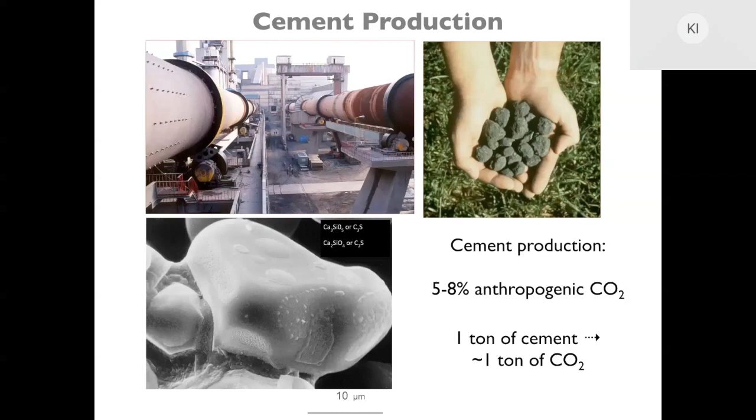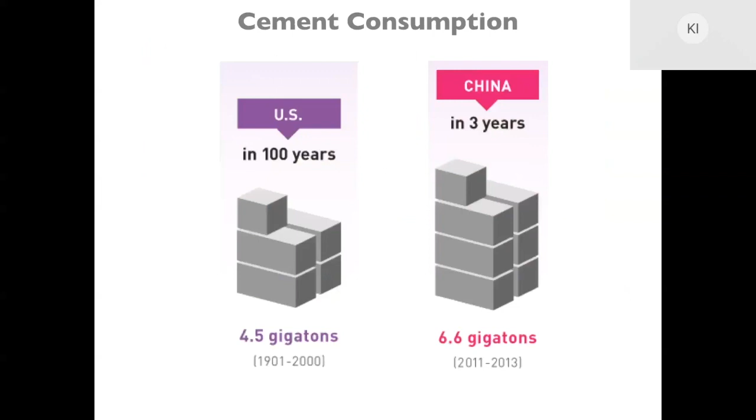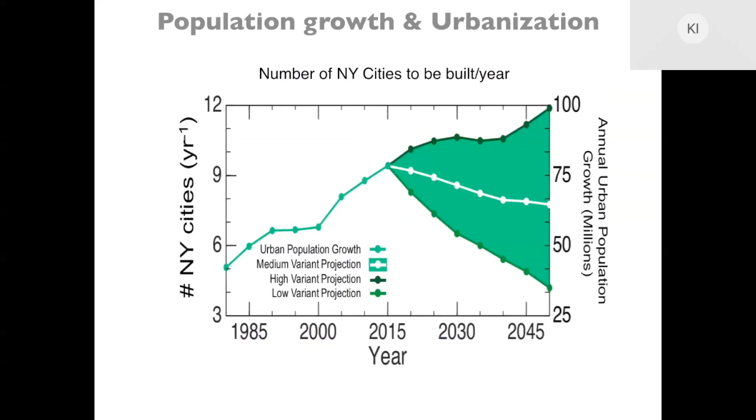This means a huge amount of cement is going to be poured in the coming years, and ideally we want the material to be very durable, so the buildings we're building stand there for many years. Unfortunately, there are a lot of problems with cement and concrete. Usually we have a nice slab of cement, and after a year, or hopefully more than a year, we have the formation of many cracks and fractures.

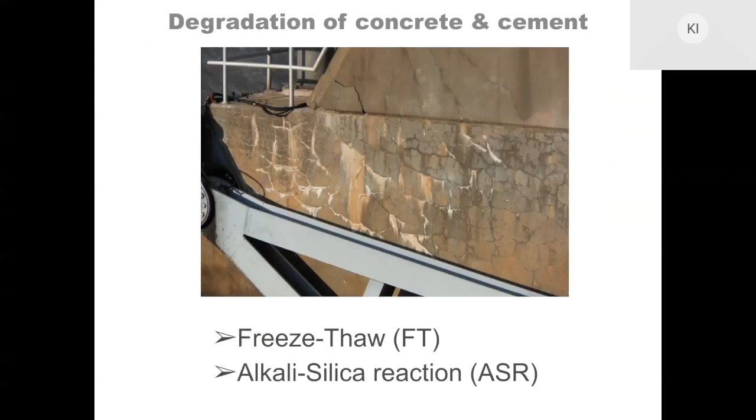Two of the main problems we have been studying a lot at the Hub are degradation due to freeze-thaw and due to alkali-silica reaction. Both of these problems have a common feature: we basically have a crystallization problem in a porous medium, where the porous medium is the cement paste and the concrete. In both cases, we have a new phase forming in the porous network. For example, in freeze-thaw, we have water crystallizing, and in the case of alkali-silica reaction, we have the formation of a gel due to the silica-rich aggregates that exist in concrete. This is the common feature of these two durability issues, but they have a bit of different conditions for why this is happening.

In the case of freeze-thaw, the problem is the drop of temperature in the winter, and this problem is getting worse as we add de-icing salts to the surface of pavements to prevent accidents, which makes the problem even worse. An important point is that in order to have this type of damage, we need a high degree of water saturation — the material needs to be saturated with water, otherwise damage is not observed.

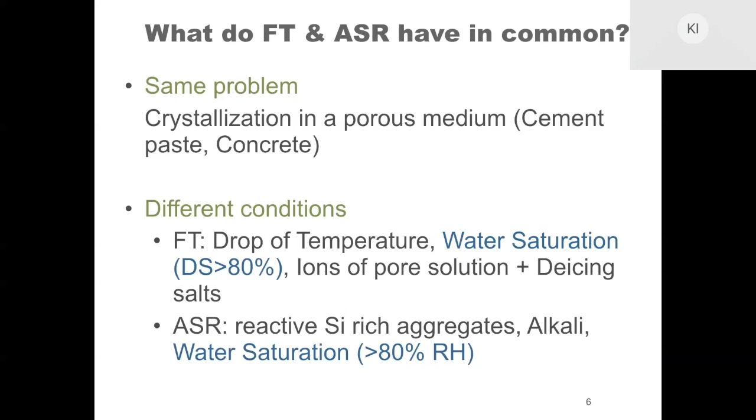In the case of alkali-silica reaction, the damage occurs because silica-rich aggregates start reacting after many years inside the concrete. The presence of alkali is the reason, but again the material needs to be saturated with water, otherwise the damage doesn't propagate so fast. So as you notice, we have two different reasons why we get this damage, and in each case we get a different phase: in freeze-thaw, we have ice.

In the alkali-silica reaction, we have a gel phase, so it's a soft phase. Actually, it's a problem of solidification, as we can better say, instead of crystallization, because it's not always a crystalline phase. But what is very important in both cases is that we need to be saturated with water.

So basically, one of the key problems is where the water is, how the water is distributed inside the pores of cement, and how it is causing the damage.

So here in this cartoon you see the reason why we have damage. Here you see a pore of cement, and inside, the blue is the new phase, the new crystal or solid that is forming. During this process, we have the confinement of ions between a nanometric layer of the cement and the new phase that is forming.

Basically, this confinement of ions is building up an ionic pressure, and this is what is pushing both solid phases apart. If the new solid phase is as strong as cement, then the damage starts passing also to the cement phase. So the new thing here is that not only water is important, but also the ions.

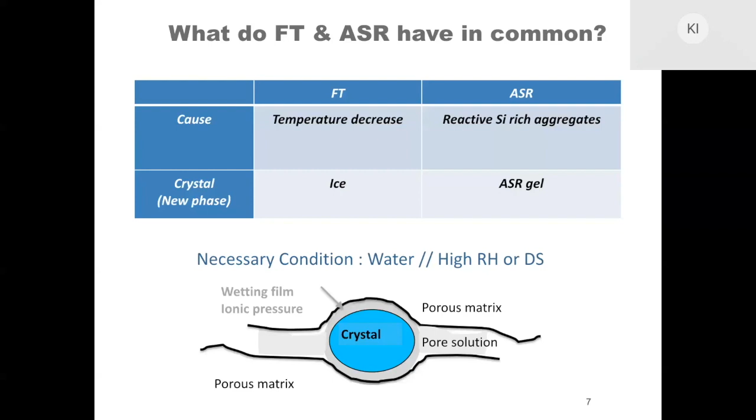With these things in mind, I will try to show you how simulation can help us gain scientific insight on durability issues of cement and concrete. We will start by looking at what are the relevant length scales to explore these questions.

Then we'll try to understand which pore sizes matter for this type of problem. Does the connectivity of the pores play a role? And then, of course, the key question is: what is the role of water, the solvent, and what is the role of ions?

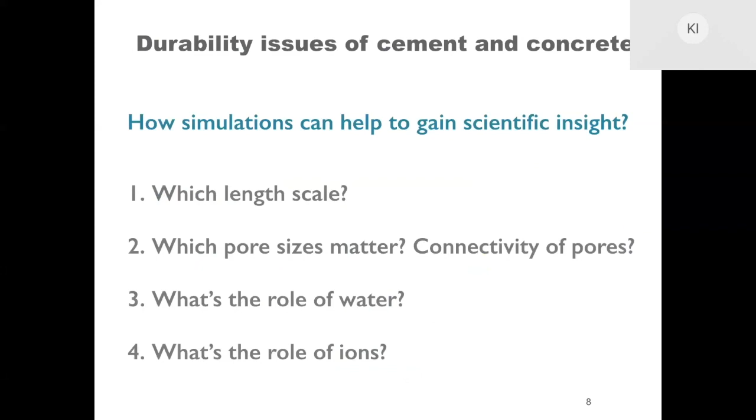As you all know, and we have been discussing this a lot through all the years of the CSHub, cement is a very multi-scale material, and it's very messy at many different scales.

In this work, we went one step further and also introduced water and ions into the pores of cement, to see what is the effect on the mechanics of this porous material.

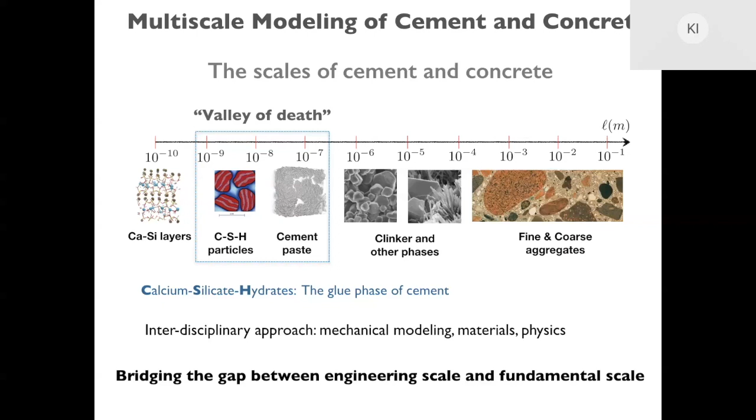I will start by showing you an X-ray tomography of a piece of cement. Here you see a piece of cement that we are scanning through. The white part is the unreacted clinker, the gray part is the cement paste, and the black is the porosity. The pixel resolution is 64 nanometers, and this was a slab of 35 by 60 micrometers.

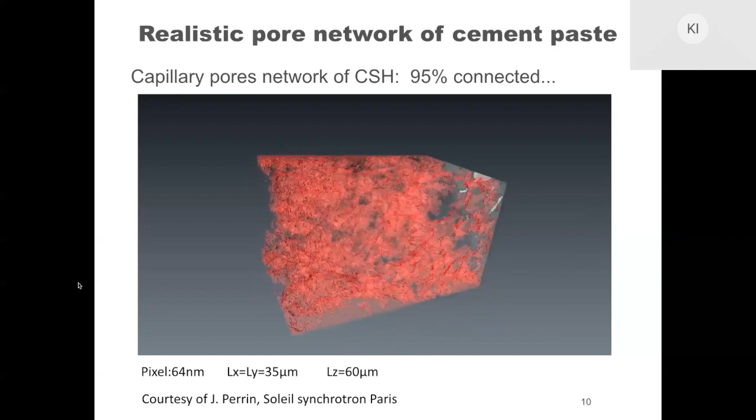The red network that you see here is the pore network of cement. As you can see, it's very complex, very tortuous, and actually it's connected up to 95%. Basically, all the pores of cement, no matter what size, are connected with each other. Very few pores are isolated in the material.

So that's a very important feature we should keep in mind when we try to model all these types of durability issues.

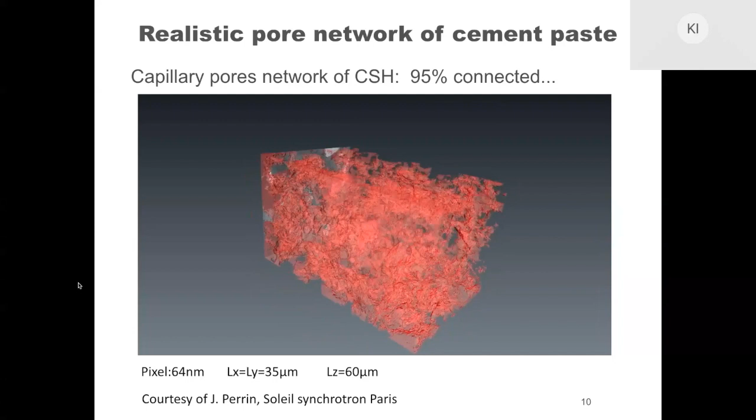Here you see the view of this material from simulations at the smaller scale. The simulation box you see here is around 0.4 micron. The gray sphere is the calcium silicate hydrate. You see them zoomed in on the side, which are nanograins of a few nanometers, around 5 to 10 nanometers.

If we zoom in inside these nanograins, they have a very complex atomistic structure that you see at the bottom. At this scale that we are working on, the mesoscale, we don't keep all the chemistry, otherwise the simulation would be very heavy, but we carry this chemistry through the effective interactions of the calcium silicate or cement hydrates.

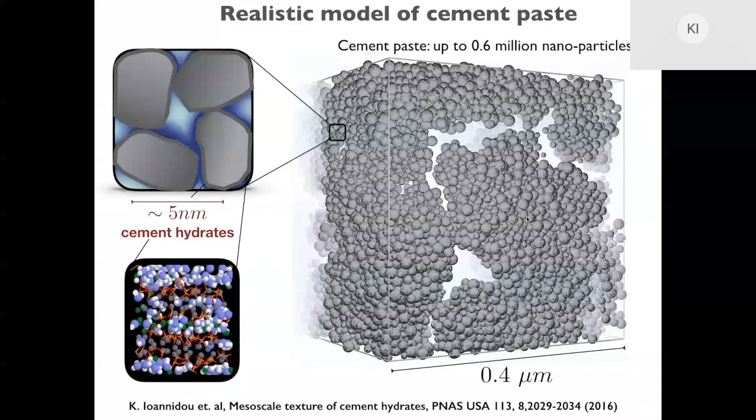I've explained many times in the past how we've done the simulations—what are the effective interactions arising from ion correlation forces. Then with the right simulation techniques, combining Monte Carlo and molecular dynamics simulations, we get a structure which is very heterogeneous, giving a very interesting pore structure with basically the two main features that one sees in experiments for cement.

These are the gel pores, the ones you see on the left in the zoom in, which are pores of 1 to 5 nanometers found in between the close-packed cement hydrate grains. Then we have the capillary pores, between 5 and 50 or even larger, up to 100 nanometers, found in the way these grains form clusters and aggregate into larger structures.

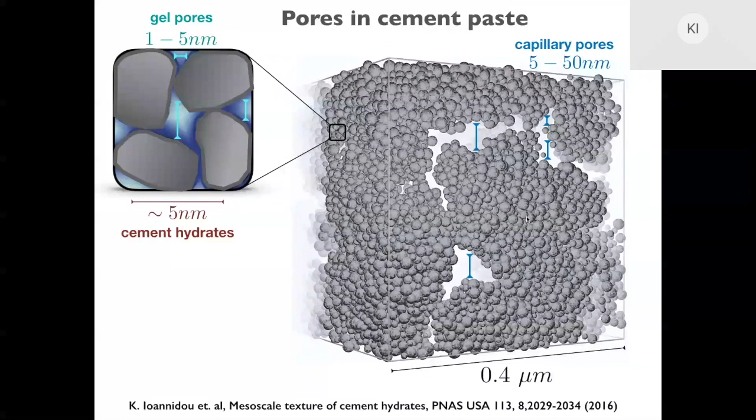So what I've just shown you here is the cement grains in gray. And if we visualize the opposite, the pore space, you see it here in blue. This is a space that will be filled in with water, at different degrees of saturation depending on the type of simulation we do.

I also want to show you the pore size distribution we get from simulations, which we have validated against experiments. It has exactly the two features found in experiments: the first peak of gel pores, and then this very broad distribution of capillary pore sizes.

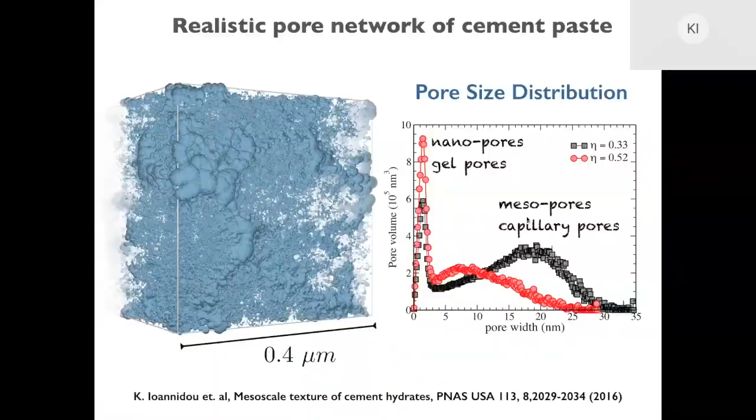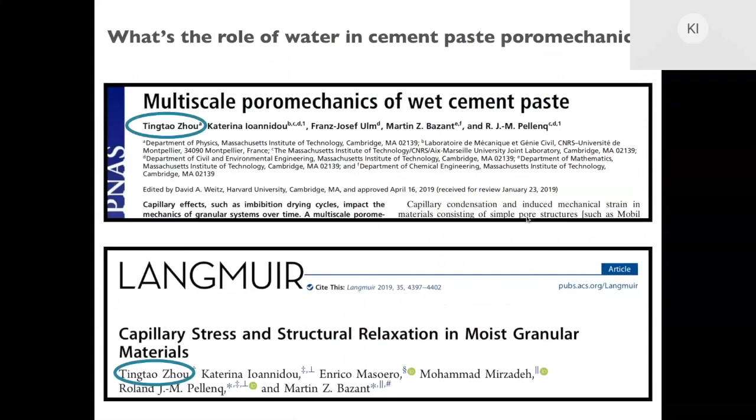Now let's enter our main question: what is the role of water in cement-based poromechanics? The work I'm going to present has been published recently in these two papers, in collaboration with Tingtao Zhou, PhD student at the Hub, who also graduated yesterday. Congratulations, Tingtao. Let's go into our main subject.

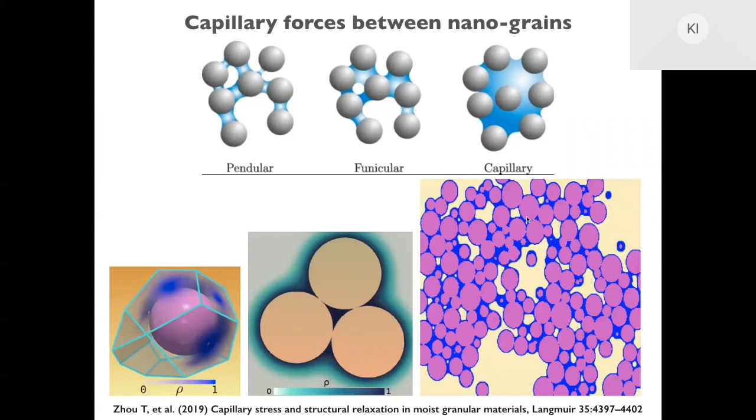To do so, we start with the cement paste model I showed you before with the grains, the one on the left. We take this particle-based simulation and turn it into a lattice, where each lattice point can be either fluid or solid.

What we did was density functional theory—a mean field approach where we write a thermodynamic potential that takes into account the interactions between fluid-fluid and solid-fluid. What's important is to calibrate these two parts, the fluid-fluid and solid-fluid interactions, from the formations of the materials we are modeling.

In this case, the fluids we tried were water and nitrogen, because those are the two common fluids used to probe the pore space of cement. We also calibrated the solid-fluid interaction from atomistic simulations.

A very important point here is that we try to see how a piece of cement, around half a micron, interacts with the fluid—water—where water molecules are very small, about 3 angstroms. So we had to make a grid of this lattice as small as the water molecule in order to use a mean field theory for this.

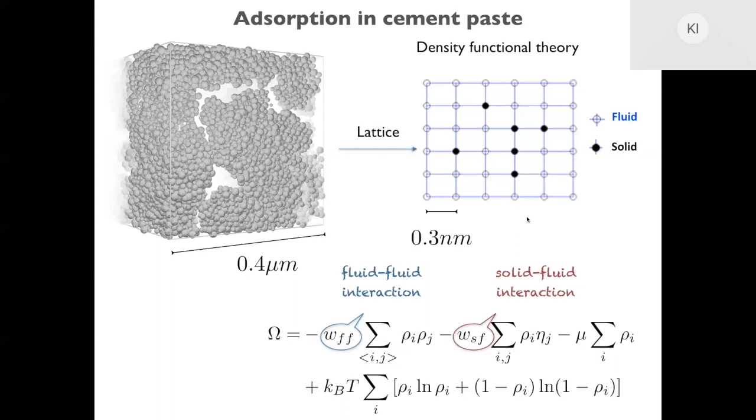With this, we were able to find the distribution of water. Here you see on top the adsorption and on the bottom the desorption as relative humidity increases and later decreases, in this example with water. When people do adsorption and desorption of water in cement, they usually observe a hysteresis. The reason for this hysteresis is this ink bottle cavitation effect, shown in red—the material takes much more time to desorb the amount of water.

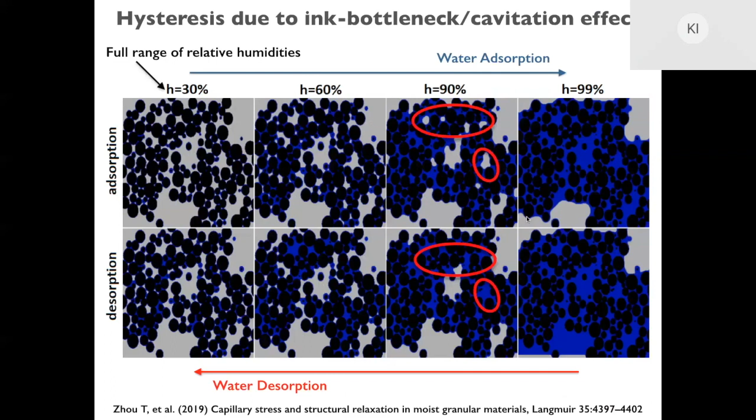The next step in this simulation was that once we know the distribution of water around the grains, we want to get the poromechanical effect—we want to couple the fluid with the solid. We did this by computing the capillary stress per particle, and to do so, we had to perform the Voronoi tessellation.

This is the grid network that you see in this light blue color on top of the purple grain. This is in order to distribute the water in a way that we get forces that are equal and opposite overall, so then we can use these forces to do molecular dynamics.

Basically, usually we were doing simulations with only pairwise interactions between the cement grains. This will keep the grains together, because of the nature of C-S-H, they're sticking together. But now we can add extra forces, the capillary force that each particle has due to the water distribution around it.

This will show us how the material is relaxing due to the distribution of water at different relative humidities. So now that I've finished explaining the technique, we'll go through the results of this study.

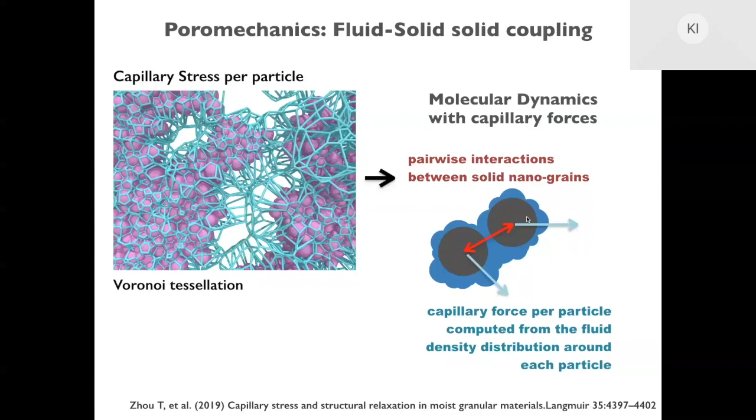So the first interesting result is the adsorption and desorption of nitrogen and water in cement. A lot of people have been trying to model this to obtain the hysteresis, especially in the case of water, but I think nobody could have agreement up to now. As you see here on the figures, we have very good agreement with experiments. In the case of nitrogen, the hysteresis is very small, but in the case of water we're able to capture all these ink bottle effects that are giving rise to the hysteresis.

So basically, as long as we have the right interactions from atomistic scale, and also the right grid size, which should be very small because we need to have the fluid, which is water-based, so water molecule 3 angstrom, and we need to have realistic pore networks for cement, so we need to go up to half a micron in order to have the full pore size distribution. Of course the simulations were very heavy because of this reason, but they're doable due to parallelization.

One more thing we did is that once we have the distribution of water, as I told you, we can then relax the structure, so see how the solid matrix will change, and then repeat the adsorption. This is like when people in experiments do multiple cycles of adsorption desorption. You can see this, we did it for water. For nitrogen there is no big difference, but for water it's the two lines that are on top. So basically the hysteresis is reducing a little bit because we have a better packing of the cement grains.

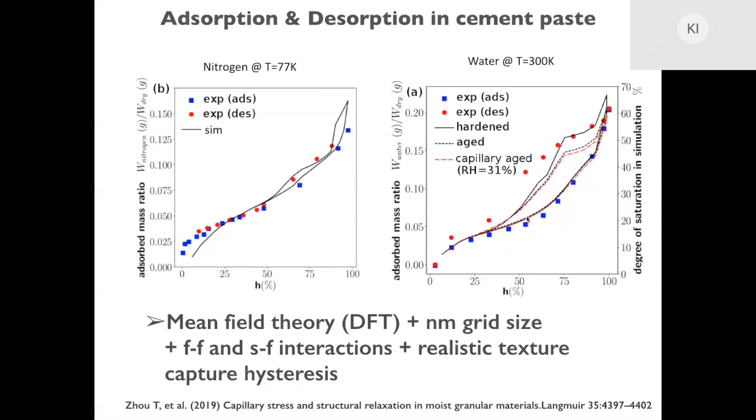So the next point is that from adsorption desorption curves, we are able to determine the pore size distribution. A lot of times in the literature there are results of pore size distribution reported using water as an adsorbent. And this is basically, as you can see here, from the comparison between the simulations and the experiments, because we can probe the pore space in the simulations with a Monte Carlo technique. Basically we take a sphere and we can really probe the geometric space, but we can also compute the pore size distribution from the isotherms, like they do in experiments, and compare the two to see which one gives the best results.

So clearly, nitrogen is the right adsorbent in order to probe the pore space of cement, because it can capture the first peak of the gel pores and this broader distribution of pores. Water is giving a weird double peak in the beginning and also is not able to capture the long tail of capillary pores. So it does a very bad job on determining the pore space of cement.

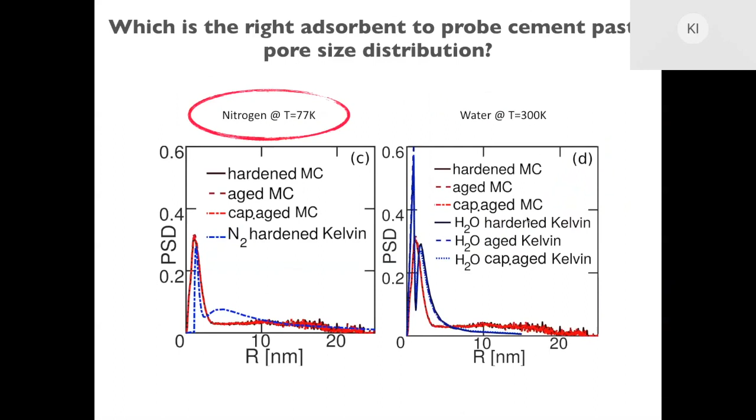So the next thing we could do was to study the drying shrinkage in cement paste. Here, as I told you, is the part where we put back the capillary forces in the solid and we relax the structure with molecular dynamics. We did this in two different ensembles. In one ensemble, we keep the volume constant and we measure the pressure. In the other ensemble, the NPT, we keep the pressure constant and we measure the shrinkage, the volume differences.

So on the bottom figure, you can see the comparison that we have with experiments. We are able to model the drying shrinkage of cement as a function of the relative humidity. The experiments are in agreement for what we call the aged paste, once we have removed eigenstresses from the paste. But we did the same for a paste that had still eigenstresses, so it would be kind of fresh after the cement has been set. In this case, this is the green and purple lines that you see there.

You can see that we have a very interesting and non-monotonic behavior with the relative humidity. What the simulation results show is that if we cure cement with relative humidity between 30–40%, that's where we get the least shrinkage, and at the same time the eigenstresses relax the best. So in a way, what people have always been doing, covering cement with a thin layer of water and plastic to avoid evaporation, is also confirmed by simulations: even at the nanoscale, this humidity is preventing the material from having extreme volume changes.

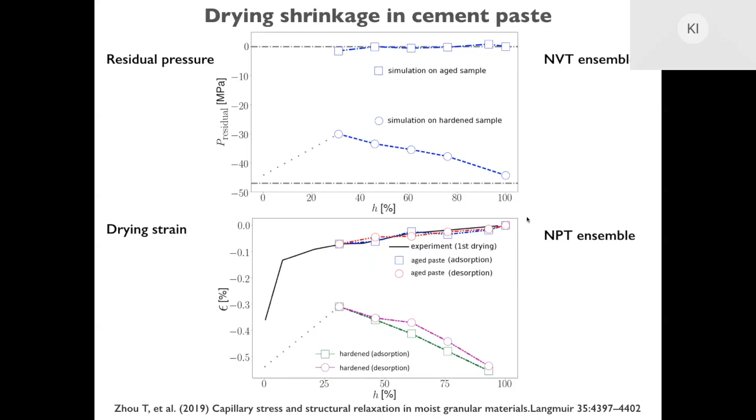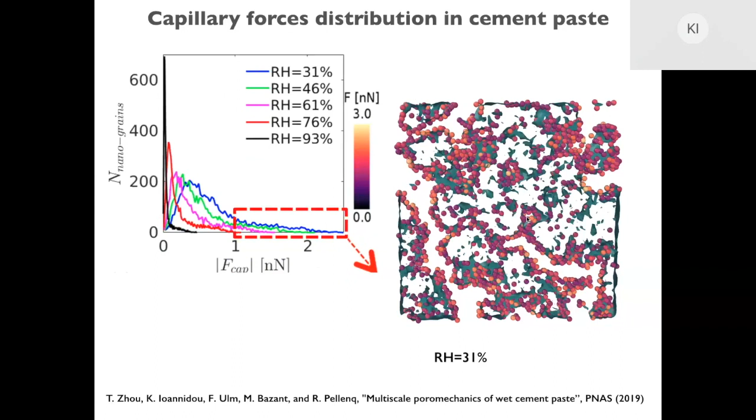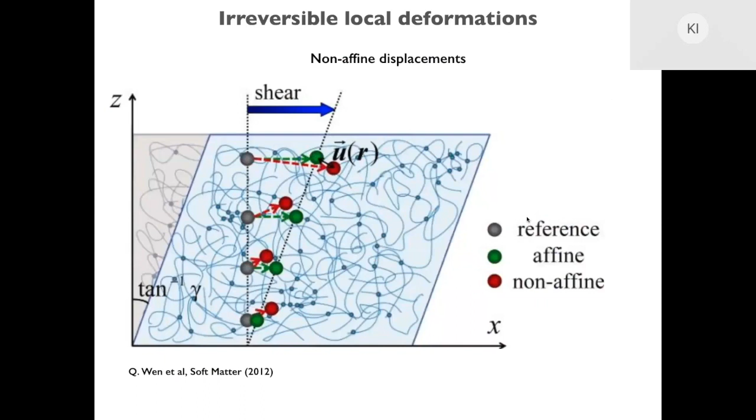Of course, those were simulations where we were relaxing the structure with no extra load. An interesting thing we want to explore in the future is what happens if we also have a load, because in real conditions cement always has some load. It will be interesting to see if these isolated local events will form a percolative path through the structure and create a crack.

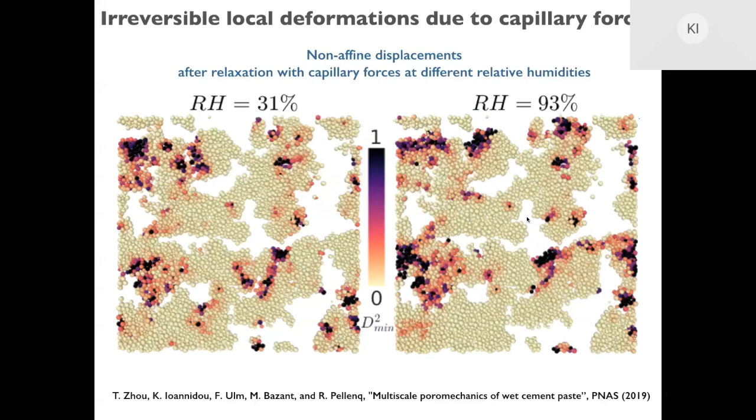This also gave us a way to find a homogenization length. The idea here is to find a length at which we could average our results, and this could help us upscale and go on to model cement at larger scales.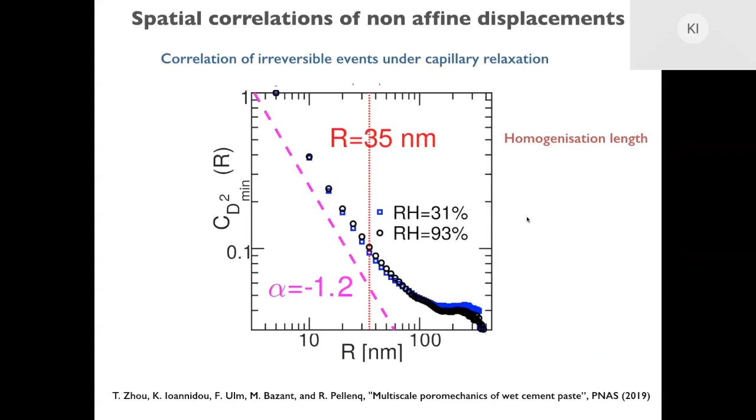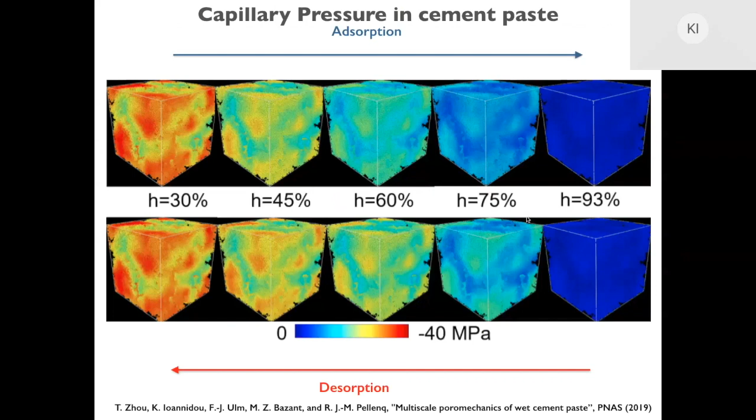So this is the work that we've done to understand how water is distributed and what effect that has on the mechanical relaxation of the material. And now the next step is to introduce the ions. So now we want to understand, in case we have ions, is this going to cause damage to cement? Because up to now, with water only at ambient conditions, we're doing good.

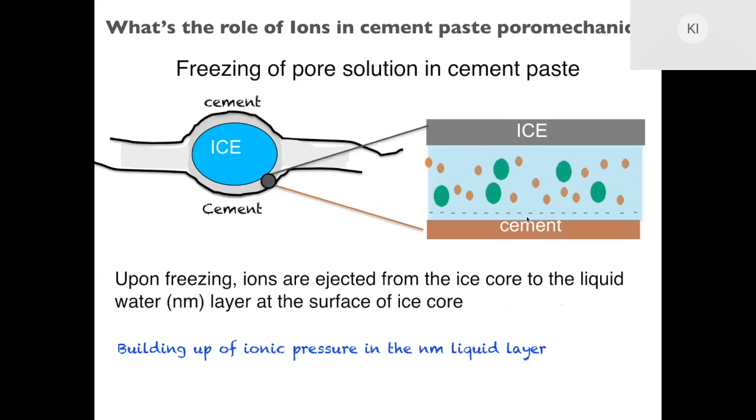So here, the idea, as I explained before and I'm going to say again now, is that we have ions confined between the new phase, the ice. Here I'm going to focus on the freeze-thaw damage in cement. There is this nanometric layer that has a high concentration of ions due to confinement, and these ions are basically pushing both solids.

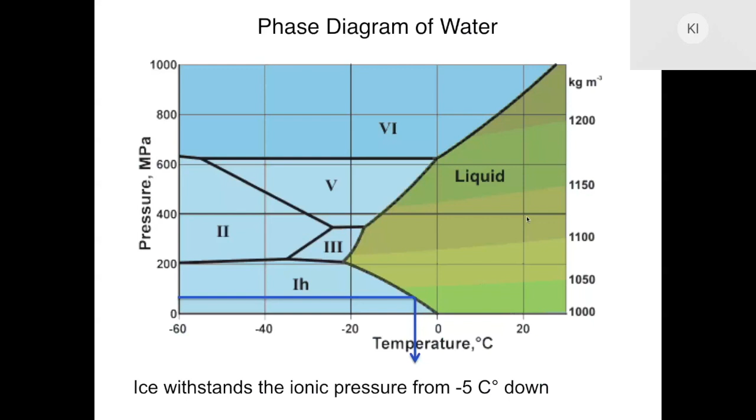The important point, as we are seeing here on the phase diagram of water, is that we don't have freeze-thaw damage at 0 degrees Celsius. We have to go down to -5, -7, -8 to start observing this damage. This is because ice needs to develop a pressure high enough to withstand this ionic pressure. Otherwise, as long as the ice is soft or has a low pressure, it is melting back due to the ionic pressure, and the cement is protected. Once the temperature is low enough and the ice has a higher pressure, then the ionic pressure is transmitted back to the cement.

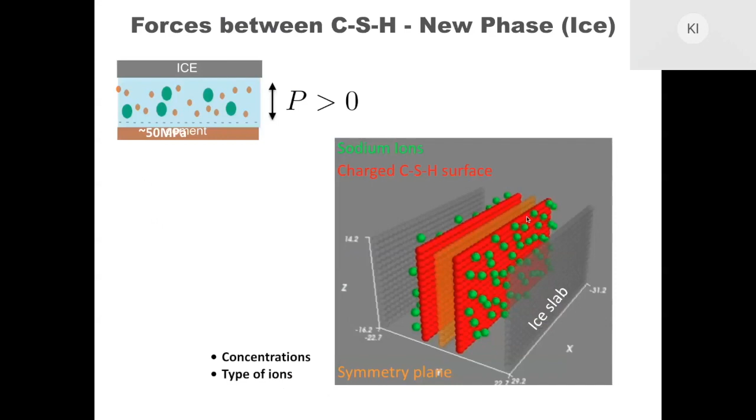So to understand this type of phenomenon, we did a simulation in 2 steps. The first step is on small scales. We go exactly to the interface between ice and cement. Here you see the simulation. We have an ice slab and a C-S-H surface, and we use sodium ions, and we have these slabs at different distances, and we measure the pressure that is created there. Of course, this pressure will depend on the different concentrations and on the different types of ions that we are using. Here the results are for sodium ions at different concentrations. We can see that we have a repulsive pressure, and the distance at which it shoots up increases as we increase the concentration of the ions.

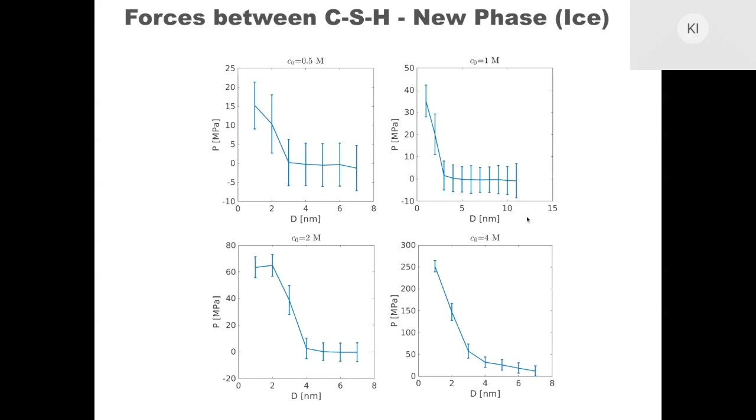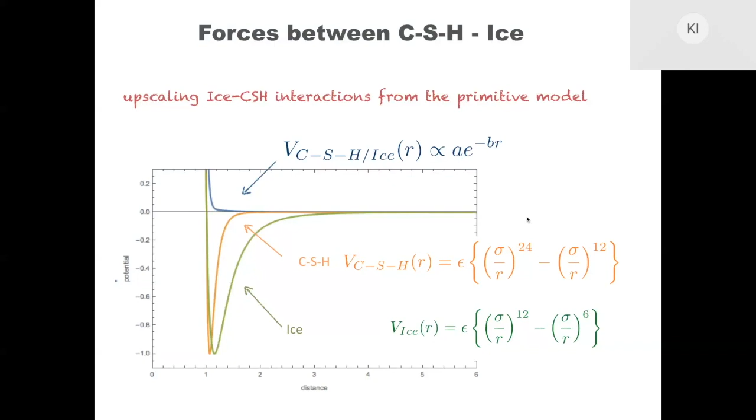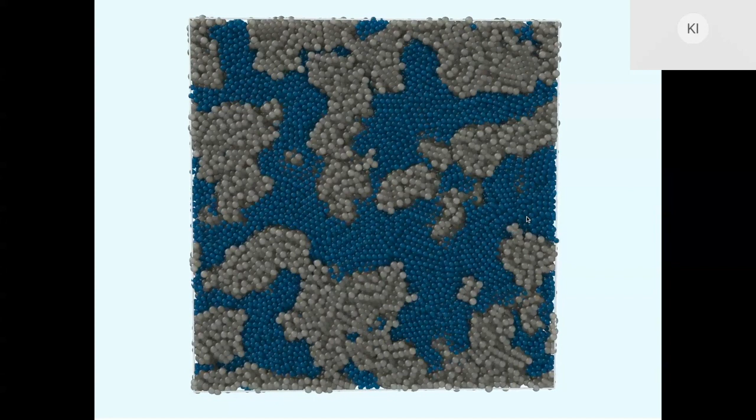Once we had these pressures, we can turn them into an interaction potential between grains of ice and grains of C-S-H. So now we go to the next step of the simulation, where we have the sample of cement that you saw before with the cement grains. The cement grains interact with the C-S-H interaction as before, and now we will introduce ice grains that have an ice-ice interaction such that they can build a solid of ice that has the right mechanical properties of ice. At the same time, we have an interaction between the 2 phases, the C-S-H and the ice, that came from the smaller scale simulations. So we start with the cement configuration, and we introduce the grains of ice with a grand canonical Monte Carlo simulation, and we observe that first the ice is clustering in the pores of cement and eventually is percolating the structure.

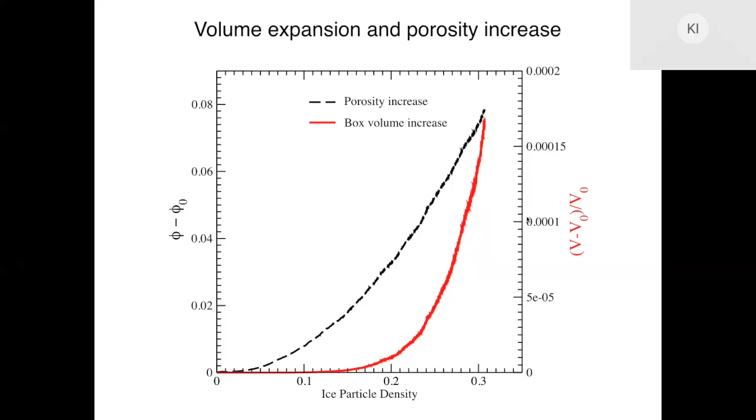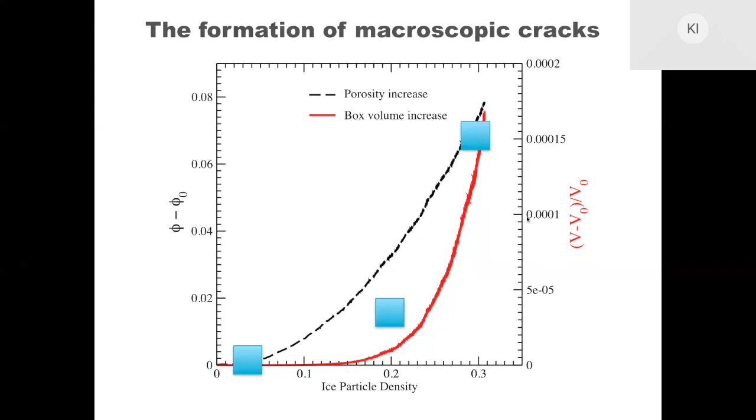Let's go and see in a bit more detail what is happening there. Here I'm plotting how the porosity is changing and also how the box volume increases with the ice particle density. We see that first the porosity is increasing inside the system, so that means that ice is helping C-S-H to pack better, but after a while the whole system starts to expand. So we start observing volume changes macroscopically. We're going to look at 3 points in detail to see what is happening: the first point is where we have the increase of porosity, the second where we have the macroscopic increase, and the final state. Initially, when we have the porosity increase, if we decouple the two networks, plotting the cement on the bottom and the ice on the top separately, we see that we have formation of ice, but it all stays inside the pore.

So we have clusters of ice inside the pore. Where we start observing macroscopic volume changes is when we have percolation. Once the ice is percolating through the network of cement, it has a collective effect that pushes the whole solid of cement, and that's why we observe a macroscopic volume change. And of course, finally, we have the formation of really large cracks.

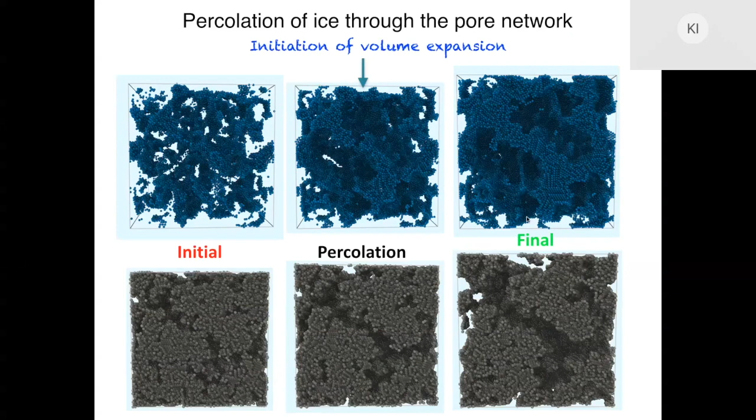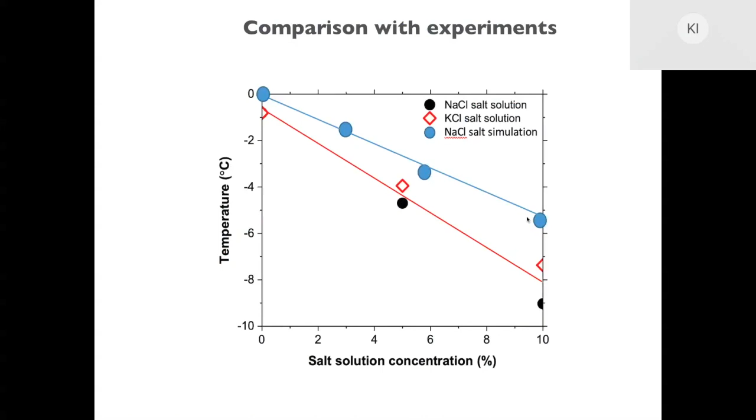Now I'm going to move to the last part of this talk, which is about mitigation strategies for the durability issues we discussed. I'm going to focus mostly on freeze-thaw, but a lot of the ideas also apply to alkali-silica reaction problems.

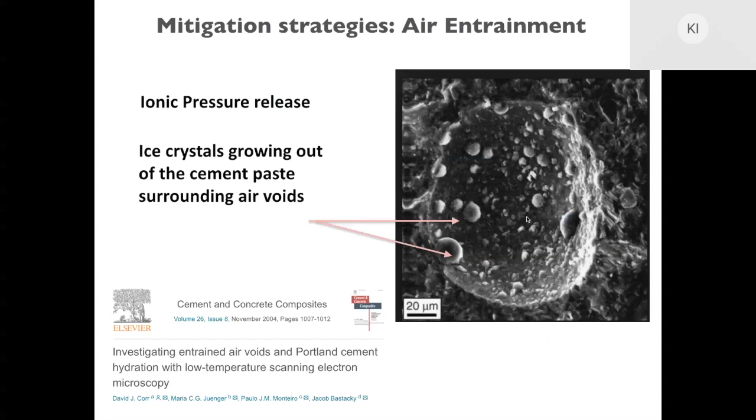A different strategy is to make cement hydrophobic. As we've discussed, the big problem with cement is water, as a material that is porous on different scales and always connected to the outside. Water as a solvent can dissolve ions that can penetrate the material at all different scales. So if we're able to make cement hydrophobic and prevent the solvent from going inside, we could prevent a lot of these durability issues.

Some techniques to make cement hydrophobic include using silanes. This is usually for surface treatments, and it's usually an expensive technique.

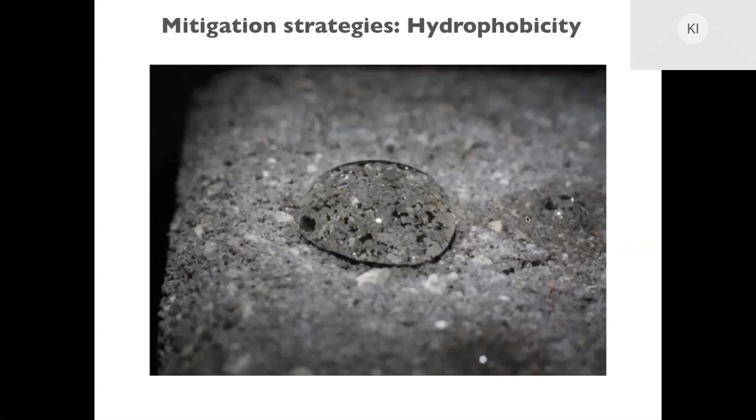So the technique we're suggesting here, with some colleagues like Roland Pellenq, Franz Ulm, Thibaut Divoux, who are all people from the hub, but also Nicolas Chanut and Renal Backov, who work at MIT and at CNRS, is to use cement carbon composites. This is a patent we recently filed between CNRS and MIT, and you can find it online. It describes how one can make this type of composite and all the properties of this material.

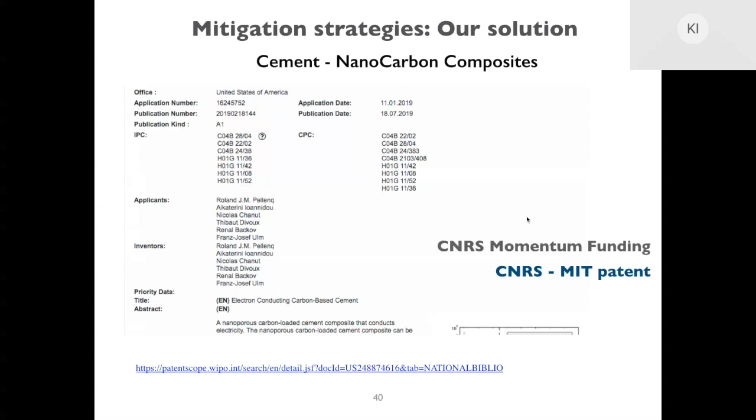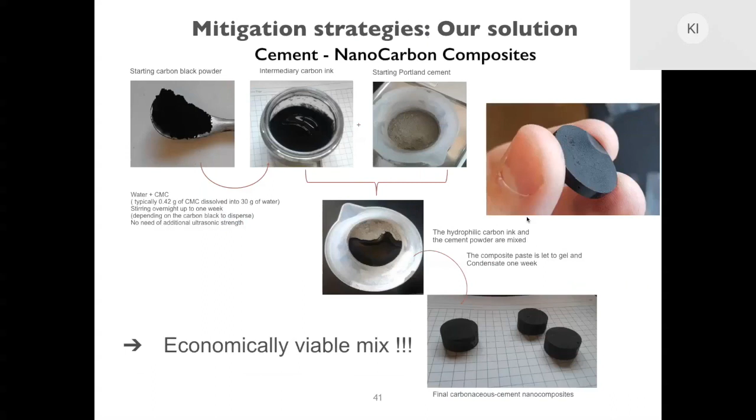I'm going to explain very briefly how we make this material and what we can gain for durability issues. The idea is very simple: basically we're mixing cement with nanocarbon particles, which are two materials that are both very cheap. Overall, you get a black cement that is very affordable, and this material has several properties that all come from the fact that we have a percolative network of carbon nanograins inside the cement.

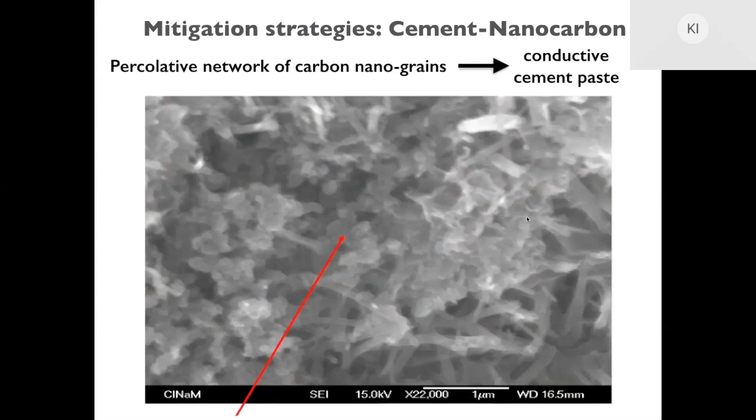The reason we can do this is because carbon is, on one hand, hydrophobic, so we have a smaller amount of water in the material. The second thing is that these carbons are porous, so they have pores where the ions can be stored. This reduces the ionic pressure, because these ions don't have to sit in the nanometric layer between water and ice, but can go and sit inside the carbon instead.

On top of this, this material has the so-called Joule effect. As long as we plug it in with a small voltage, we can increase the temperature of the material. Here you see an increase of 5 degrees, but in recent results, we can go even up to 100 degrees.

So basically, the same material prevents freeze-thaw on its own, but also if we plug in a small voltage, we can melt the ice and even evaporate the water. So we have a synergetic effect of the two that can completely prevent the damage of freeze-thaw.